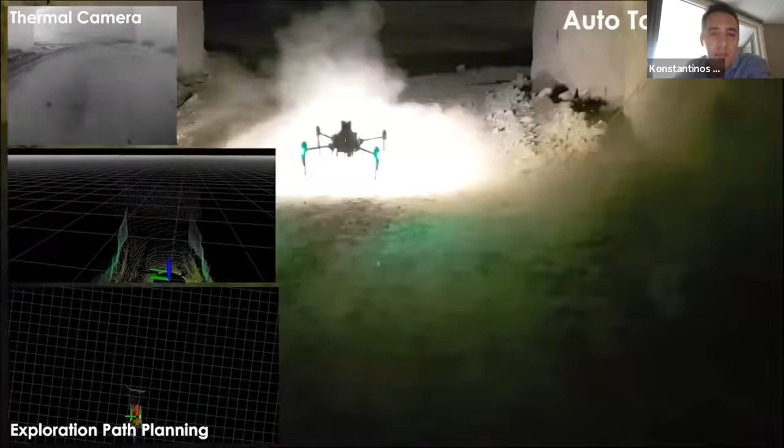But before that, let me just show a small video that is kind of a mashup of results, just to indicate that we want systems to be able to access, navigate, and conquer effectively a diverse set of very challenging environments. So here's a drone, flying in an underground tunnel.

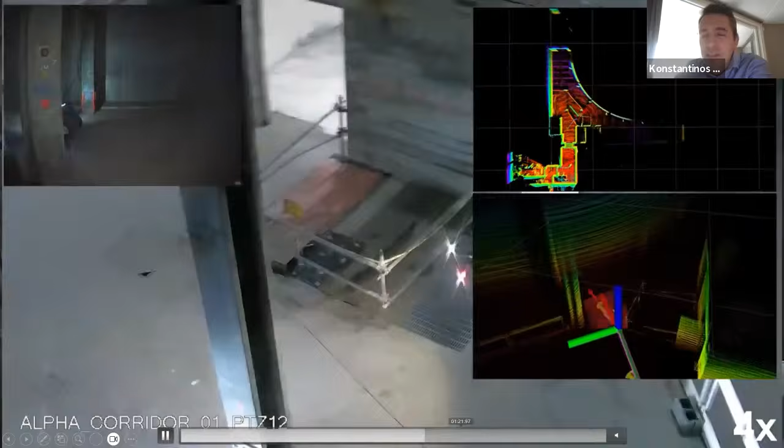Here's a legged robot performing exploration in an underground tunnel. Then we can see the process of deploying 4 of such systems in an underground network of different facilities. We can see this drone flying through smoke and dust, navigating and exploring a nuclear power plant. Most of these results come from the DARPA Subterranean Challenge in any case.

Exploring and inspecting a ballast water tank inside a ship, on the sides of a ship, so the ballast tank facilitates stability of the ship. The same drone exploring an underground abandoned mine, also somewhere in Norway, close to Trondheim, close to the university. And also a modification of the same drone navigating through a forest, eventually all of them with a goal of getting some sort of meaningful representation of the environment, understanding reason about it, and so on and so forth.

So I think the key message I want to point out is that we care for autonomy that is deployable anywhere with very little preparation, if any. So the ultimate holy grail, of course, that everybody considers is the ability of enabling robotic systems to go at any place, in any condition, subject to any possible uncertainties and risk, and execute a mission with safety and reliability.

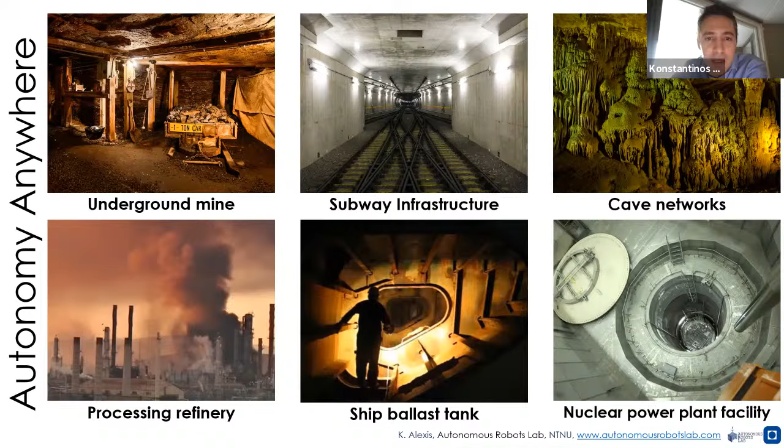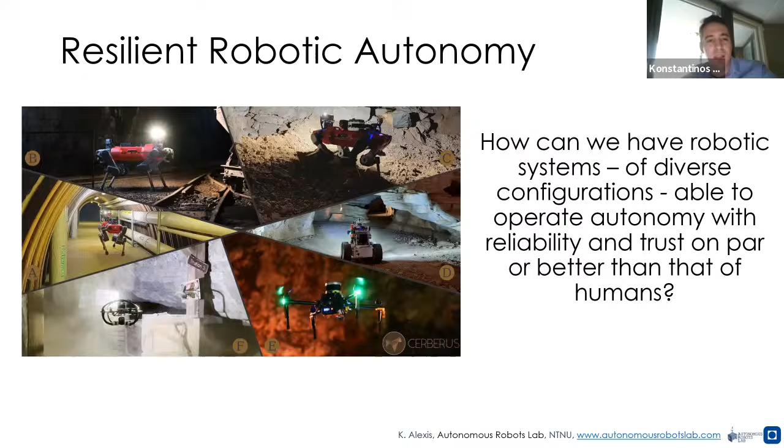Now, if we try to think about this in a general sense, then we ask the question, how can we have robotic systems of diverse robot configurations, not only flying, for example, not only ground? And what is the commonality between trying to develop autonomous solutions across diverse robotic systems in order to instill onto them reliability and resilience? And if we look at general studies about resilience, we will see that we are asked to instill into systems these 5 key properties.

This is the universal recovery, the ability to recover from an error, response to an error, response to a challenge, robustness against errors and challenges or uncertainties, and so on and so forth, redundancy in case of potential failure of any of its components, and resourcefulness, which is different than redundancy in the sense that it's not only necessarily replicating solutions, but also using your own resources in a different way in order to execute the mission to the best of your capacity, right?

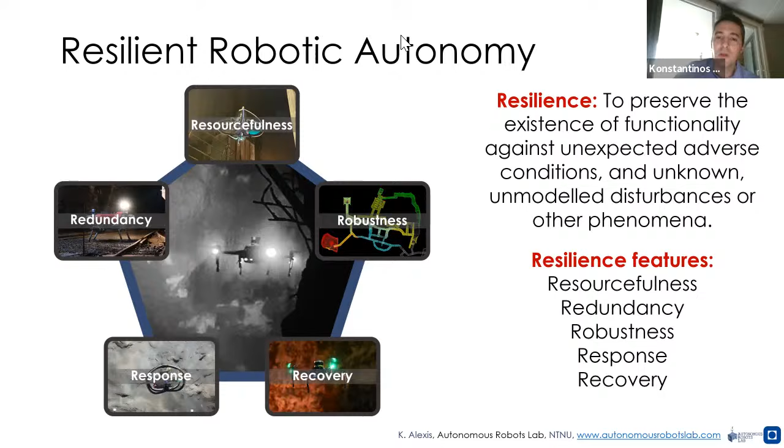And at least ensure the safety of the system and the safety of the environment, of course, and of course, the maximum potential capability of executing the mission.

Now, if we try to think how we can instill resilience, we should think of the general loops of robotic systems. And my main first view is that despite the great progress we have on data-driven methods, it is a very good idea to try to modularize the architecture of a robotic system in the sense that it is key to identify what are the specific components that have to be designed, what is the role of model-based or traditional methods, let's call them, or data-driven methods within each of them, and put them together in an architecture that makes sense in order to facilitate and prove, or at least demonstrate or verify with whatever means of verification this is most applicable, that the system will operate resiliently in any environment.

I'm going to spend 2 or 3 minutes on a very simple diagram, right? Just to consider that, typically, if you come from a controls background, your view about the robotic system is typically something like this, right? There's a system, there's a control module, there's a planner, some perception module, which in the simplest case just performs basic state estimation. And of course, in the last years, people have also coined the idea that, well, we can just learn all of it in an end-to-end fashion.

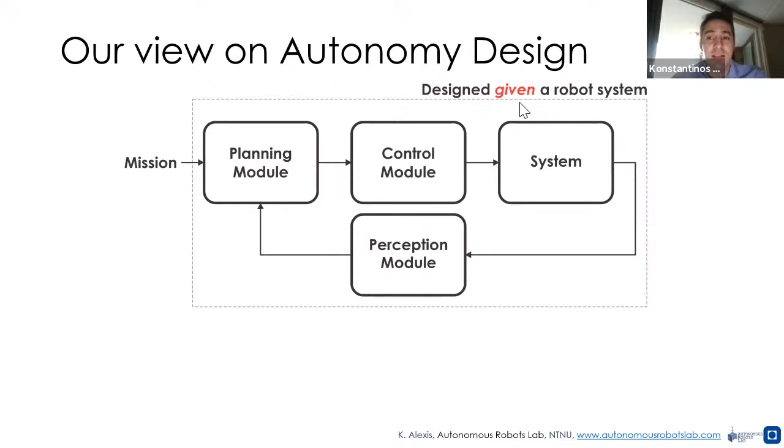In both cases, people are designing this given a robot from some designer, some company, and so forth. So there are two limitations in the core pipelines: one limitation that breaks everything into subcomponents perfectly and designs it given a certain robot, and another limitation that still uses a certain robot design but tries to learn an end-to-end module.

Of course, in reality, people are doing more like this at the moment. They have several modules with models and learning into each of those, and there is more interconnection between the modules and more back and forth communication between them.

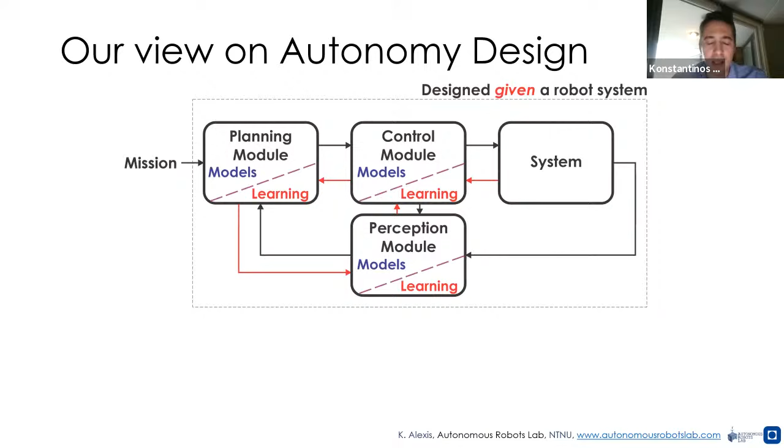But I think the most important thing we should be going toward in the future is the potential of co-designing autonomy and embodiment, connecting our research with the broader discussion about AI. The first core message I want to make today is that robots are embodied agents, and this is a distinct feature compared to general AI agents. So we should consider not only, given a robotic system, what can we do for its autonomy, but could we explore the co-design of robot embodiment and autonomy synthesis.

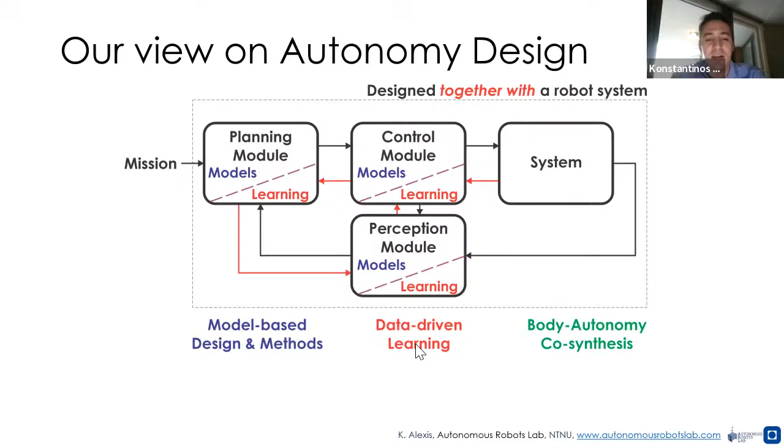If we focus still on the lower part of that, I'll comment about this co-design at the end of this talk. We should be thinking about the synergy of model-based design methods and data-driven learning, and of course the best synergy is guided by the notion of performance and safety.

Back to my comment on embodied agents, I highlight that we should not just treat robotics as an application for other domains and perform the best possible SLAM or best possible control and so on, but we should reflect on the specific needs of robotic autonomy, and possibly what a robot design in terms of an airframe, a legged robot, or an underwater system can assist in making autonomy more resilient.

In other words, it's a good reflection to think that, for example, our body is very forgiving of potential errors of our autonomy, our ability to navigate. What I'm going to try to talk about today is this direction: how can we instill resilience into system control, planning, and perception?

So let me now jump directly back into the modularized resilient autonomy architecture and try to go topic by topic, from multi-modal perception to path planning, and then to policy learning, and eventually demonstrations from robotic systems.

When we say resilient perception in the view of our lab at the moment, the core things we care about are: first, we need to be able to operate without infrastructure support or other means of external estimation of the robot pose or any other part of the state. We typically just say GPS denied, but this broadly means no infrastructure support. Sensor degraded conditions in terms of self-similarity, darkness, obscurance, and so forth degrade the quality of the sensor data. We need to be able both to perform SLAM in these conditions, but also reason to the extent possible about the environment.

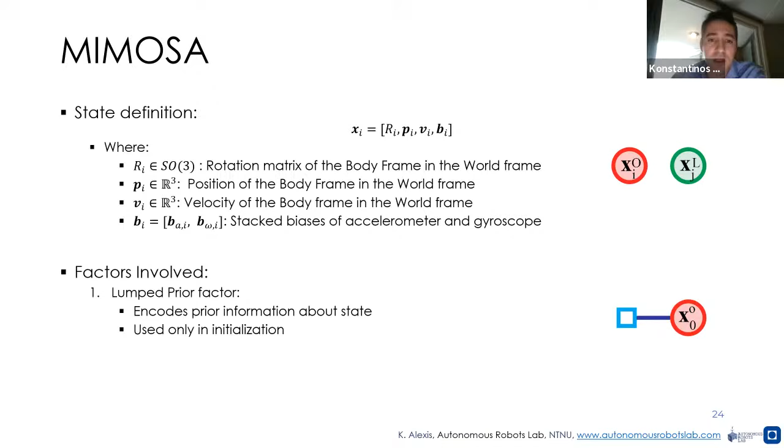We believe factor graphs are a more applicable tool to incorporate the relevant formulation in a flexible fashion. It allows calculations dealing with short-term associations, but also mid-term and long-term associations, estimating the robot pose and including constraints from different modalities—vision, IMU, LiDAR, and so on—in distinct ways, while still incorporating constraints from any such modality.

Importantly, it allows us to deal with modalities arriving at very diverse and possibly not perfectly synchronized timestamps, which is suboptimal but can happen on a robotic system. It allows us to operate on different spatiotemporal scales through a fixed lag estimator combined with a full pose graph, and this can run on multiple architectures, possibly on two different levels.

It allows us to deal with a constraint that later is found to be ill-conditioned, due to, for example, geometric self-similarity, and to connect and disconnect constraints from the optimization. It also allows us to detect short-term degeneracies, for example by tracking the eigenvalues of the underlying optimization on LiDAR registration, or long-term degeneracies, which means we can reformulate the graph back in time and use it for estimating the robot pose going forward.

This means we are effectively changing how the Markov process evolved over time, because we identified later that some earlier estimation was wrong. We need this ability to dynamically reformulate the graph in order to correct future errors for ill-conditions detected later in time.

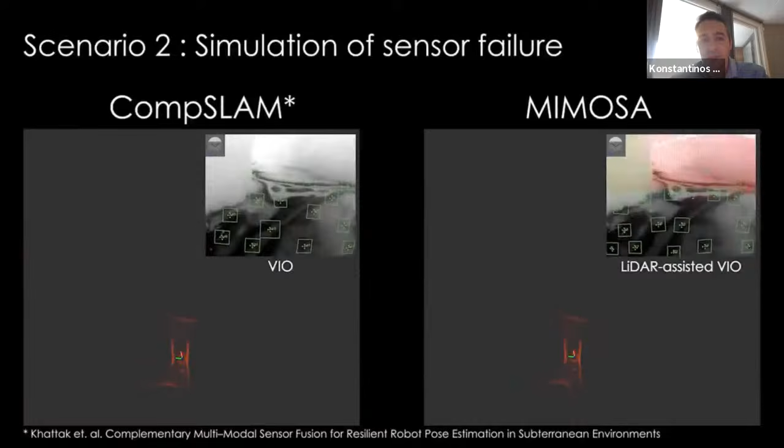Here we're fusing thermal data and LiDAR data, and we've simulated artificial loss of LiDAR data. We can maintain reliable localization and mapping even under such conditions.

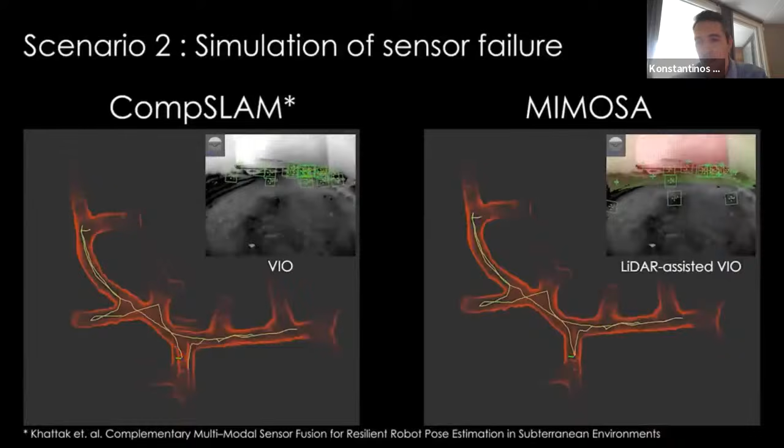I think this is currently well established in the state of the art—nearly all teams in the DARPA Subterranean Challenge provided some solution of this nature. So I think this is something we want to keep building further, to make it effectively a tool that can incorporate any such modality.

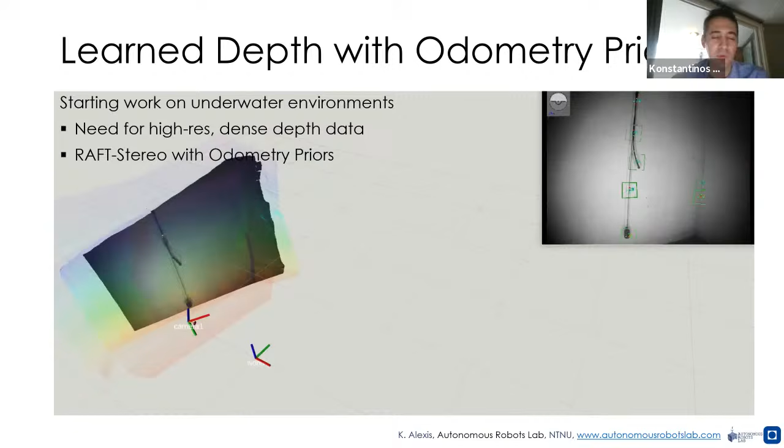Any such modality, either directly with traditional methods for incorporating and assimilating relevant sensor data using traditional registration techniques, or by improving how sensor data can be incorporated through possibly learned methods. Here's an underwater test for learned stereo depth that incorporates odometry priors—again, the idea of combining learned methods with traditional techniques.

The odometry priors are incorporated in order to use the previous point cloud and the odometry update to predict how the future point cloud would look, and then to initialize and optimize the problem to converge faster and more accurately to the solution of what the current depth is.

I go through many topics in this talk because I'd like to present our overall architecture for resilient autonomy. But the key takeaway from the previous slides is that we want a solution able to deliver at least the ability to know where you are in the map of the environment, subject to any condition—and the solution to that is primarily multimodality.

I haven't yet commented on understanding the environment, semantics, and so on—I'd like to do this as part of the section on resilient planning. In path planning, it's very common to solve single objectives such as exploration, coverage, or path planning. At the same time, it's obvious that a robotic system deployed in a very complex, industrial environment is unlikely to be expected to execute only a single task, unless it's a highly tailored, human-driven, highly supervised process. If we care for really autonomous systems, we first care for multi-objective, multi-hypothesis optimization.

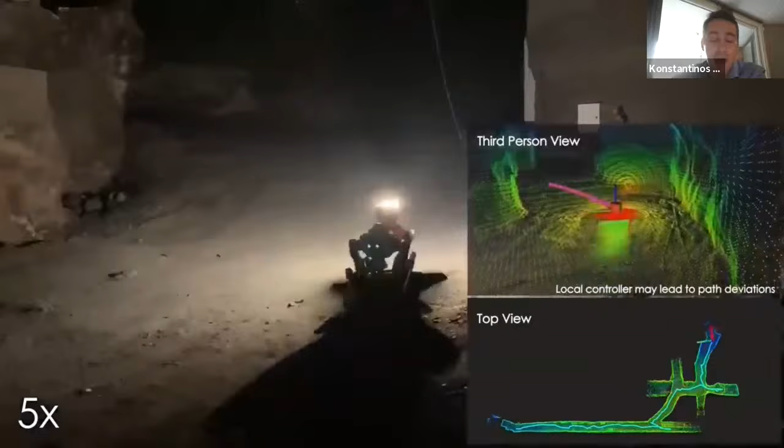This was actually a few months before our team went to Kentucky for the SubT Challenge finals. At this point, what's key to understand for the mission, otherwise it just looks boring, is that the robot performs this relocation process multiple times in order to reposition itself to interesting areas of the environment that are pathways for gathering more information before returning home.

At return home, there will be a flying robot that will actually execute the remaining exploration of the same area of interest. I'm not going to play the full video—it's relatively long—but at this point, for example, the flying robot is exploring its own path in the environment.

I mentioned that it's important to reason, not only to explore or inspect. Reasoning about certain objects of interest in the environment is also a means of compression. If I go into a very large scale setting but only care about particular structures, for example for some industrial inspection application, I not only have means to focus my attention more, but also means to compress the information I really need to store.

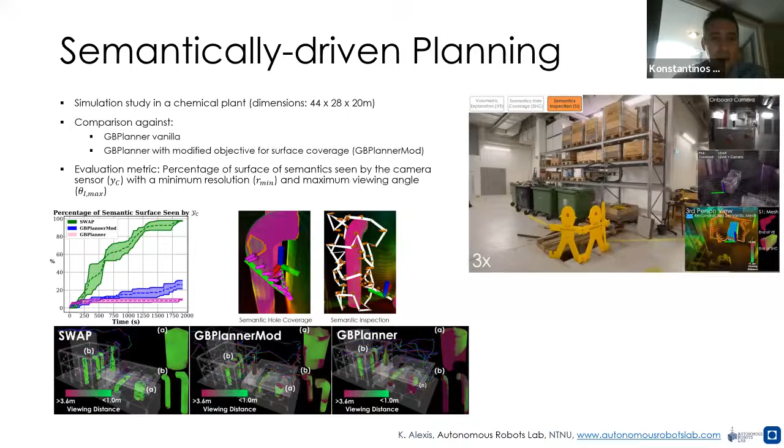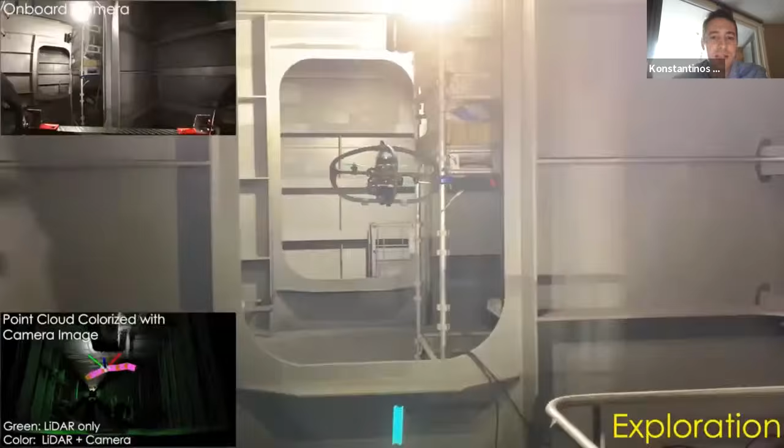We can take this now and go to very different environments compared to, for example, the Tartan Challenge, enter the ballast tanks of a ship, and here we deploy the robot. It's actually exactly fitting the access hatch of ballast tanks, and we get it to explore these environments and provide maps for us.

Here you see, for example, the results where the system conducts a process that bifurcates between two behaviors: an exploration behavior, which ensures volumetric coverage so the LiDAR has seen everything in the scene, and at the same time visual inspection, where the system switches - this is what's executing now - makes paths that look all around with certain resolution and incidence angle guarantees in the environment. It's going to execute this over several sections of this ballast tank compartment.

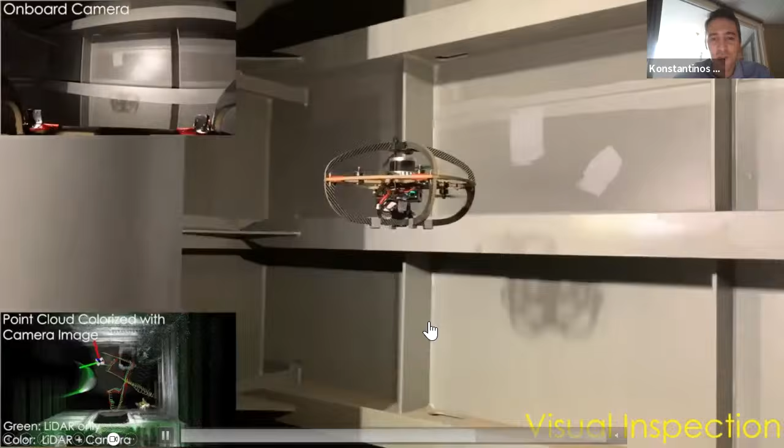Now, ballast tanks are rarely as large as you see in this particular setting, which is kind of spacious, where we just have to go through very large doors. Most likely, ballast tanks look also something like this, and the pear-shaped manhole that you see there is 0.7 by 0.5 meters in size, and the robot is roughly 0.4 meters in width.

So it is key to have a system that makes actually a small bump due to some small error in Z, but without any particular problematic effect on the system.

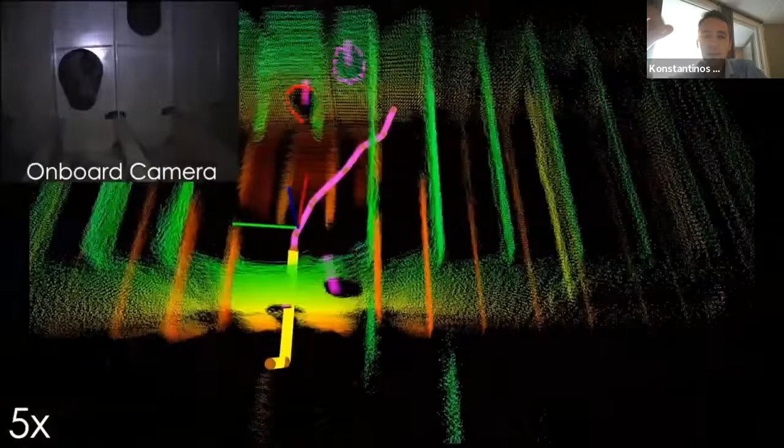It is key to have a methodology that's able to scale across environments that can be, in principle, very large in overall scale. An actual FPSO vessel, for example, has multiple hundreds of meters of such ballast tanks inside, but at the same time has to be able to negotiate particularly narrow cross-section access pathways and so on.

So we need the semantics not only to know what to expect, but also as a way to identify how we navigate better such types of environments. This is also why we have this terminology: inspection semantics and navigation semantics. And we're using the manhole detection here as a navigation semantic to drive the exploration process of this zone.

Now, resilience and reliability also means you can take the same method and apply very little to no change and deploy it in a vastly different environment. So we were here actually last week in some field tests in Helsinki, or outside of Helsinki in Finland. We're deploying this exploration method in order to negotiate, navigate, explore and map a forest there.

It's quite notable that it's a forest that's highly dense with many sticky branches, which represent very difficult obstacles to detect and therefore avoid in the volumetric map. Nonetheless, the method worked, to our surprise - or not necessarily, but in a good sense, surprise - it worked reasonably well in this environment. The thing we couldn't do much about was going faster, since it was never really designed, tested, or tuned for any such environment. But even without any tuning, it was able to provide reasonable results.

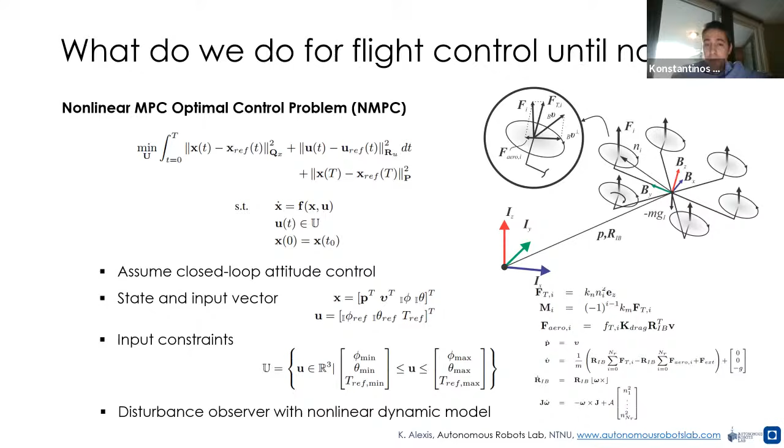And the formulation that you see here is very old, comes from the times when I was doing my PhD and later my postdoc at ETH, but it's something that's quite standard currently in the community, to implement some sort of MPC for a flying robot. You can also use any other type of control, if this is your preference. There are some good benefits.

For example, here the robot has lost a propeller. It keeps overall XY authority, but otherwise it loses yaw.

I would like to depart from this classical approach of splitting everything into modules perfectly, and instead think of control as three things. First, a way to fly or go to a particular destination—that's the classical approach. Second, a way to avoid obstacles and ensure constraints—not only the classical sense of well-defined state and input constraints, but constraints generally in the environment, such as avoiding obstacles or traversability for a ground robot.

The third thing would be a methodology to gather, at very local, short spatio-temporal levels, the information necessary to plan all your other actions—to get better data for your SLAM system, better information for semantic reasoning, and to eventually plan better paths for inspection, exploration, navigation, traversal, or possibly different robot manipulation tasks.

So we try to create a kind of super module—a control policy that will not rely on the necessity to have maps. We don't want to replace the need to have maps; we want to have maps, and we want to exploit onboard SLAM and so on. But we also need a system that is ready to work even when traditional SLAM might fail.

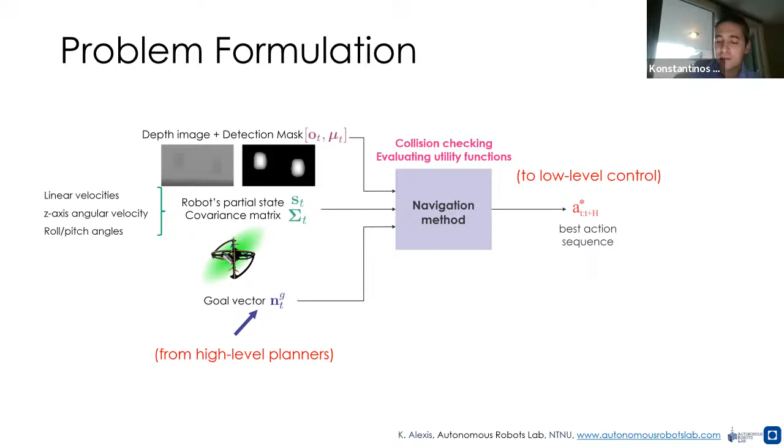Then we want this navigation policy to be able to spit out control actions to follow, commanding a low-level controller that executes, for example, roll and pitch commands and thrust commands for a multi-rotor—essentially replacing traditional position control, while simultaneously offering resilience against significant, long-term failures in SLAM, and also the possibility to attend to particular viewpoints and areas of interest.

Now that's the architecture of this particular method. We call it Oracle, and it assimilates a depth image, or a sequence of depth images eventually, and the robot's partial state. It has a motion primitives library and a collision prediction network that identifies which of these possible actions are collision-free. I'll also show an extension of this to account for information gain.

Eventually, this involves a layer that compresses the depth image, going to increasingly lower dimensions of the original depth image. Then this is combined with the robot's partial state.

Instead of taking only the mean of the robot's partial state, we're also going to get the uncertainty into account. For that, we're going to use the unscented transform, getting sigma points for the uncertainty over the partial state.

We're going to use an LSTM, a recurrent network, in order to better predict the effect of a certain action and train this methodology. But instead of training a single network, we're going to train an ensemble of collision prediction networks in order to better deal with the epistemic uncertainty of the process, while the aleatoric uncertainty is mostly related to the uncertainty over the robot's partial state.

So we take the covariance into account and use the sigma points over the covariance to account for it. We're going to get motion primitives represented in 3D velocity space, so we'll be commanding velocities for the robot.

As mentioned, there's a component that deals with the aleatoric uncertainty over the robot's uncertain partial state, and a component that deals with the epistemic uncertainty through a deep ensemble of collision prediction networks. This especially relates to how we best handle cases of weak input data.

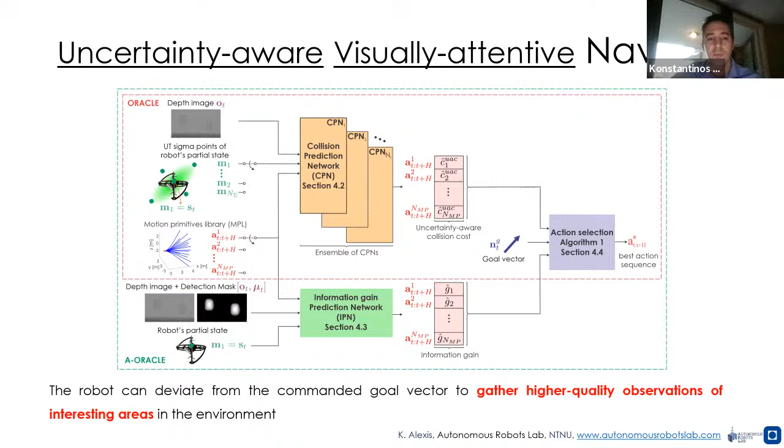We can take this general principle and feed it back to the previous method, forgetting the need for a map, and use this mask associated with a depth image to train an information gain network that uses an expert which truly knows how a certain viewpoint gathers future information about the area of interest. We do this in simulation, of course.

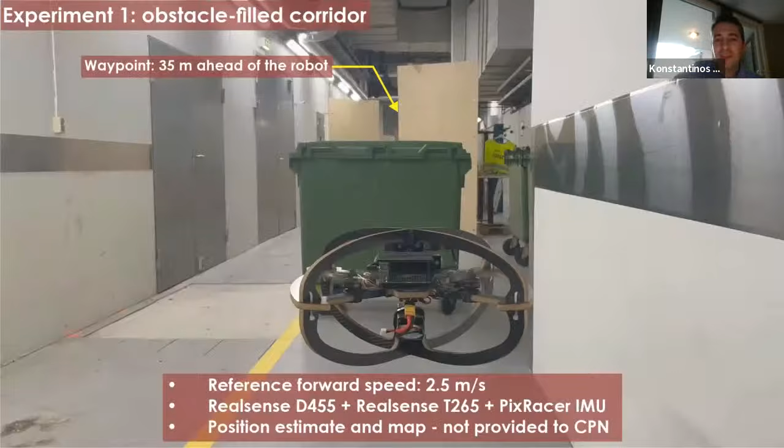This information prediction network can then output a prediction of the information value of any of the motion primitives mentioned before. Within these motion primitives, we can take the one that is safe while simultaneously offering as much information gain as possible.

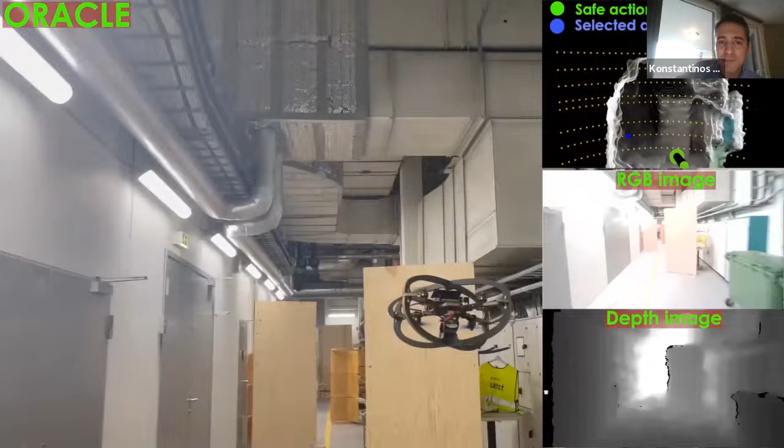Let's see some experimental results. Here the robot will take off, flying at 2.5 meters per second. Remember, there's no position feedback in what you see, and no map of the environment at any point in time. The robot will navigate the setting and avoid obstacles in its environment with good success.

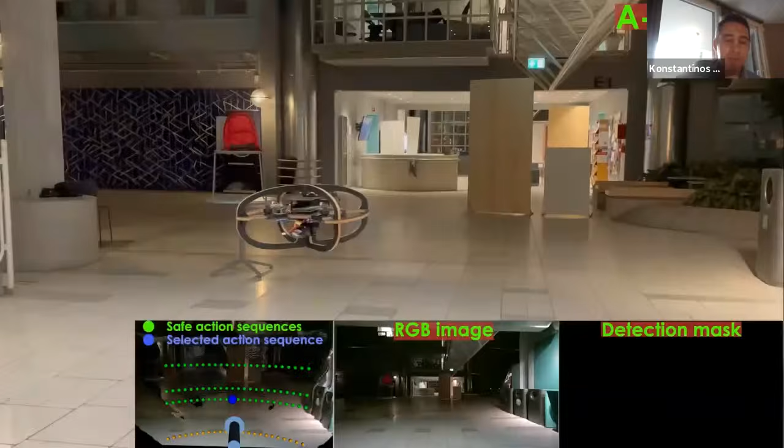Now if we take the same setup and deploy the robot not only for collision avoidance but also to attend to objects of interest, which we give a mask by running an object detector, we can fly and the robot will look towards the area of interest.

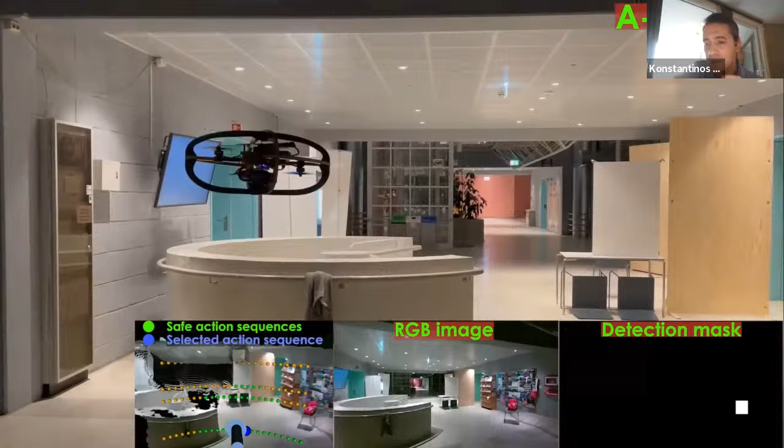After it comes within its view, it makes a small adjustment of its viewpoint while it keeps going towards the desired destination. It's key to mention that in this particular result, the velocity estimation actually failed miserably, but the method does not necessitate that the velocity estimation is reliable.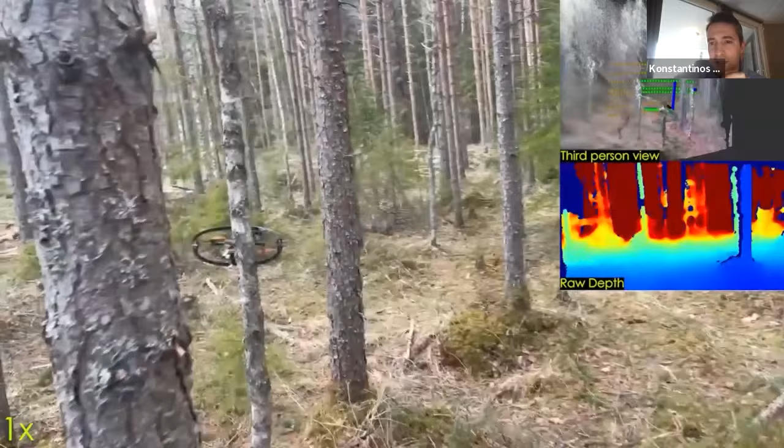It only necessitates that you have a good model of your uncertainty. Just keep using the forest as an example of transferability and resilience in very diverse and different conditions. This is from the same results last week, where the same method, never deployed before on forest data other than one week prior when we went to Finland to perform this test as part of the project, is able to negotiate reasonably well this dense forest, with multiple trees per square meter.

Now, however, you could criticize that there's nothing modular in that—here we trained an end-to-end policy. So we reflected upon this, and we thought that the greatest limitation of training this policy end-to-end is that although we can get relatively easily data that presents the problems of real sensors, we have no way to model them in very high fidelity simulation, or it would be excessively difficult to model all the problems of real sensors in simulation. So although we can easily get data of real environments, we have no way to assimilate them in this training process. Therefore, we remodularized and redesigned this pipeline.

This modularization allows us to train a semantically enhanced variational autoencoder that compresses the latent space, and this latent space will be used alongside the robust partial state to perform the process I described for collision-aware navigation, as a control policy that runs at a very high update rate. These methods run at 20 Hertz, for example, on the onboard computer of the small drones you see on our side.

These drones are all between 1.2 to 1.5 kilos in total weight, including all sensors, batteries, and so on and so forth.

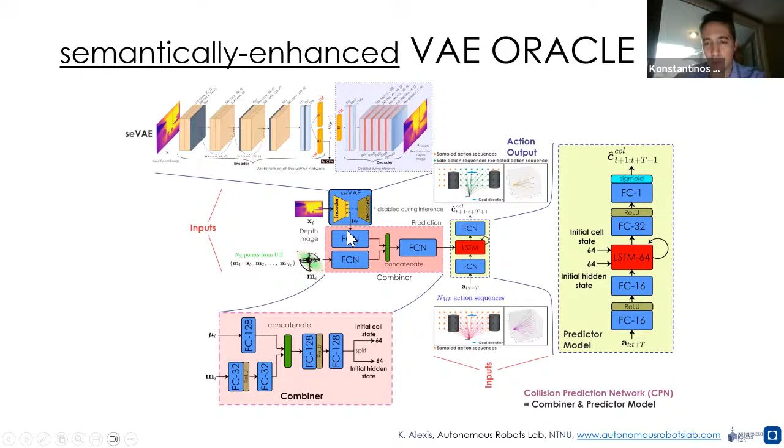So we go, for example, in this architecture from the depth resolution of a classical depth camera—let's say 128 variables—which are then fed into the collision prediction network, a great reduction in input dimensionality.

Here are some results, and we demonstrate that if you were to use traditional methods, you wouldn't be able to reconstruct this properly at the reduced dimensionality, for example with FFT, as reduced as the semantically enhanced VAE. Just a traditional VAE will also fail because it doesn't pay particular attention to the difficult-to-reconstruct objects of interest, and the semantically enhanced VAE actually manages to do exactly that.

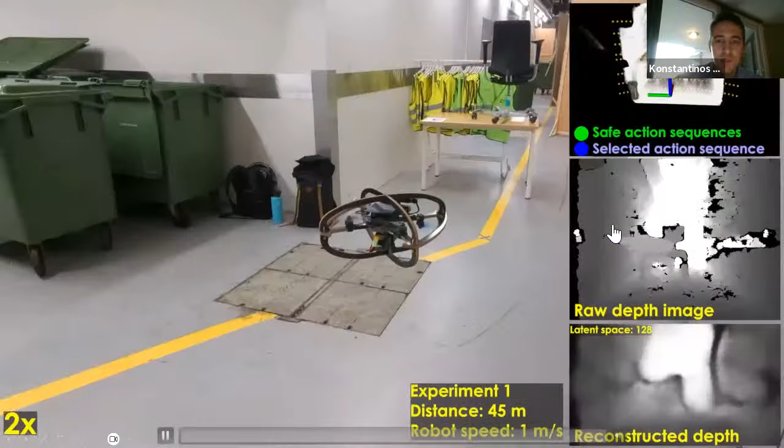So if we deploy this now on the robot, the result you see here shows the system does not perform SLAM, does not have the position estimate of itself, and so on, but has the attitude estimation, because attitude estimation for flying robots is relatively easy to achieve, and it's able to negotiate navigation within this packed environment that also involves some what we call thin obstacles.

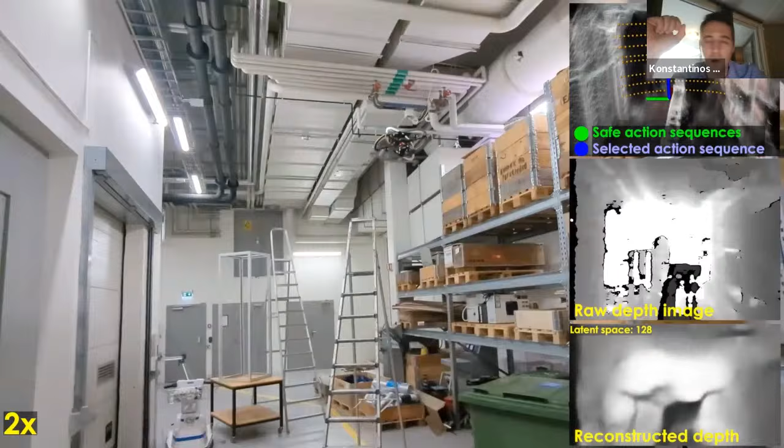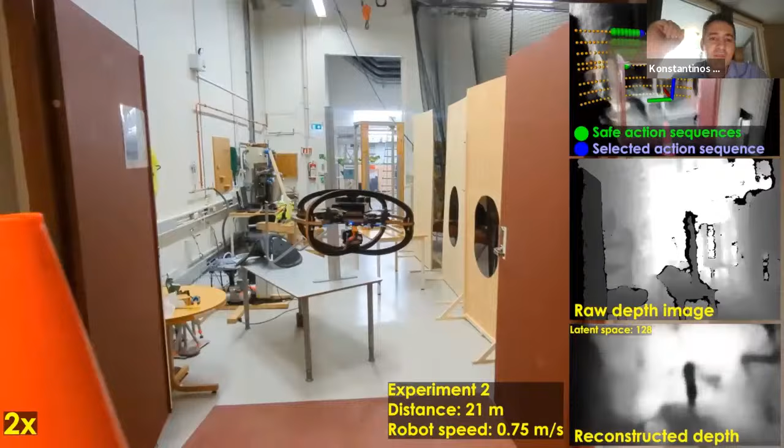Now, this one, really thin, was 4.8 centimeters. In the next part of the video, this is going to be up to 2.5 centimeters in width. And another key factor is that we are able to run this increasingly faster as GPU availability onboard increases.

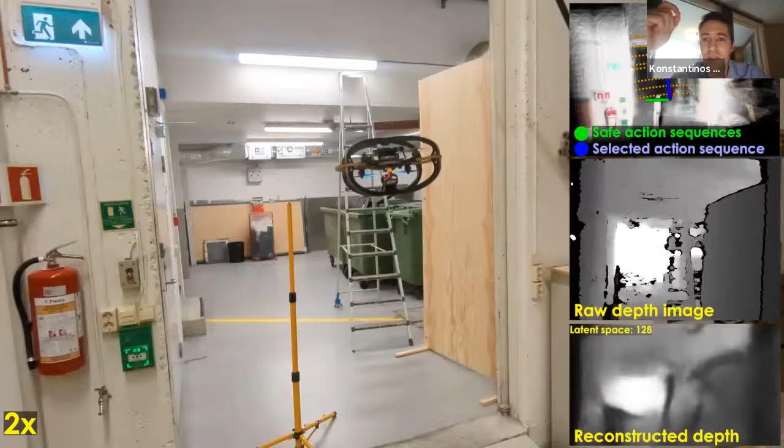I believe it's not far away to run this up to 50 or even more hertz, which means we can run these prediction and inference loops very fast, and eventually achieve faster and better control, including collision avoidance, which allows us to mitigate some risk on the path level.

Again, just as a test, we took this modified method back to the forest, and it was able to negotiate this particular dense forest reasonably well. Those of you who do field robotics might notice some duct tape on the system. The only problem was that our main visual estimation for getting the velocity of the robot was pointing somehow upward, because this robot was originally made for underground environments, and pointing up towards the sun is not the best thing. That took quite some time to fix in the field test.

Since I mentioned field tests, I want to highlight, coming into conclusions, the great importance of field results. As a personal statement, it's not only because we can see and evaluate the results. For me, the most fruitful process of field testing is that we see things we didn't necessarily expect in lab evaluations, and this often enhances our research agenda for a good amount of time into the future.

What you see here is the Cerberus field testing regime from 2018 to 2021. This was a highly international team with colleagues from the US and Europe, including Switzerland and the UK, and several entities in the US. I myself also moved from the US to Norway during the execution of the project, and therefore you see many tests in many places.

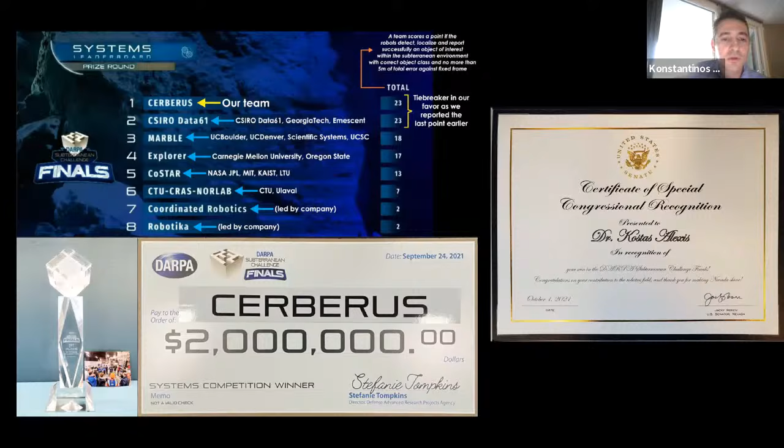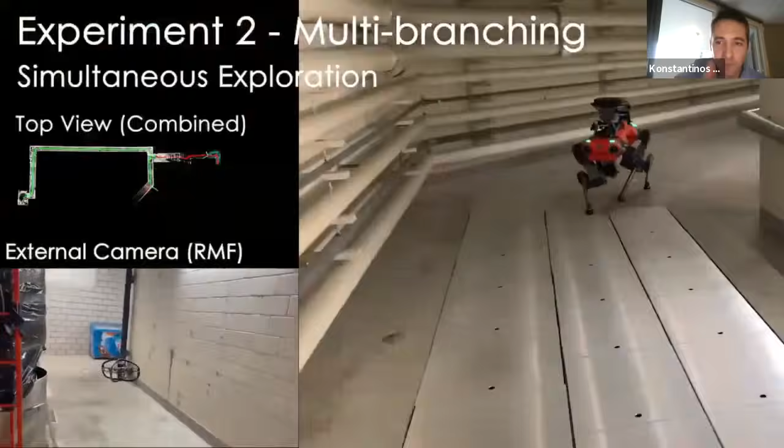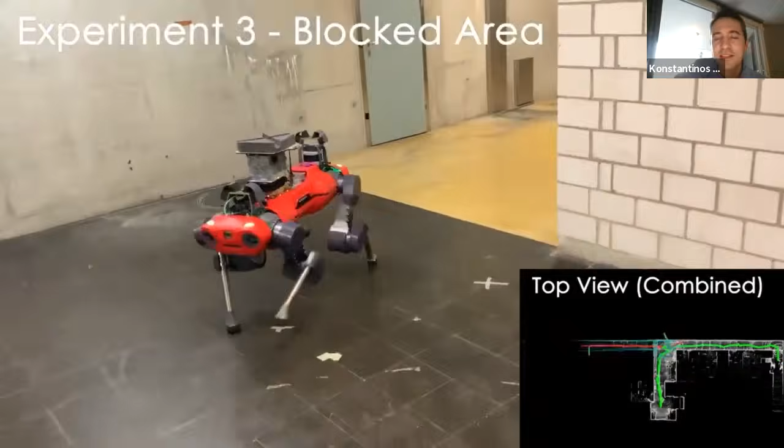Before I close, I want to highlight a couple of things in terms of what we consider a good lab, and also some ideas for the future. Here's an idea of what we consider a good lab: this is an integratory process. I think these are things we do because they're cool and because robotics are cool, so nobody necessarily required a legged robot that deploys a flying robot, but some things of that nature are cool. Some things in robotics can be very useful, and we haven't achieved their deployability so far to the extent necessary.

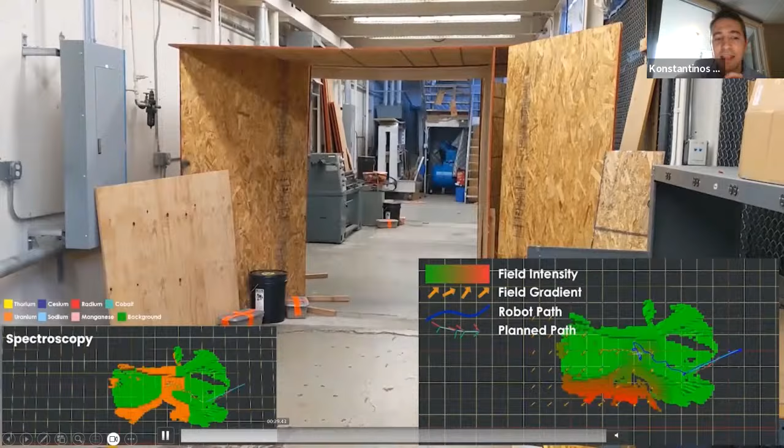This is a robot that demonstrates the ability to do nuclearized mapping, characterize radiation, and identify isotopes of interest. This is happening to a certain extent - recently, for example, a deployment in a DOE facility in the US - but this should happen much more, because robots are ideal to take on a host of relevant applications we don't want to send humans to, and also to work alongside humans, for example in industry.

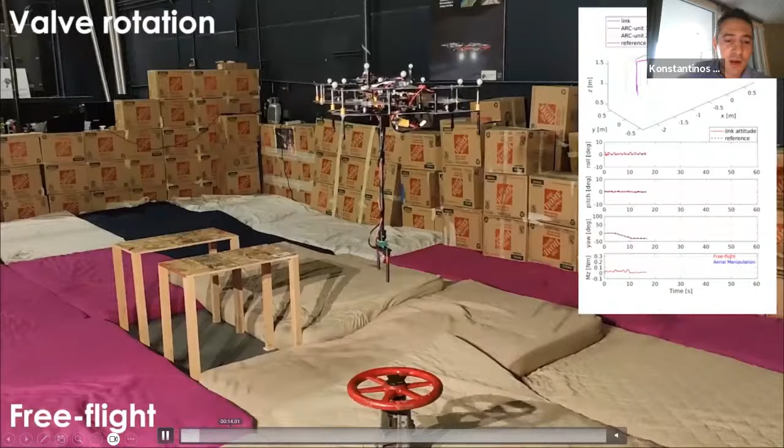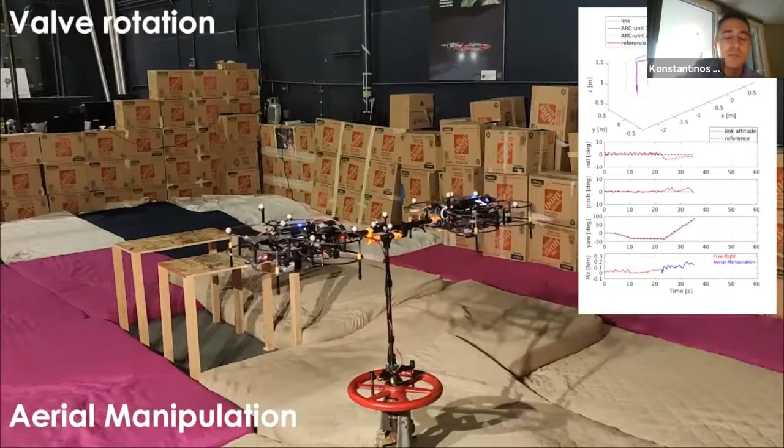We can also do things that are interesting just because nobody asked. Here it's a connected multi-robot system: two quadrotors connected with each other performing a manipulation task. The underlying math of control is very beautiful, and the stability proofs are very valuable to develop during a PhD, with lessons learned that are transferable, even if this particular system isn't the one industry will use in the future.

Before I close, I'd like to explain one picture summarizing where things will be going for us in the upcoming future. We're going to investigate the possibility of co-design between embodiment and autonomy.

I think this idea is quite old actually - people have explored it through evolutionary design and so on. But the key observation for today is that we can remove the rate limiter of designing a controller for automatically generated embodiments. The rate limiter was that we didn't have success in auto-training, RL, or otherwise learned controllers. But now we have great success learning control policies, including collision avoidance tasks, at very high rates - potentially on par with generating new variations of a robot class.

So should we be using quadrotors for any type of environment, as we tend to do nowadays? Should we use quadrotors plus rotorcraft designs and so on? Up to 2023, if we look at the drone domain alone, we are mostly using miniaturizations of traditional aerospace designs. There is work on biomimetic approaches, but that follows another paradigm - copying what we see in nature. We could instead design optimized machines in terms of their autonomy functionality and capabilities for a certain class of environments.

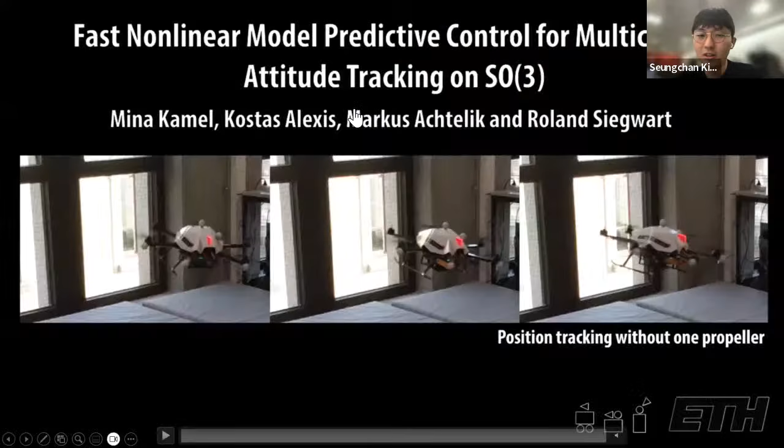For example, you can use a voxel map and say I perceived this area or I didn't perceive this area, colorizing every voxel accordingly. Nonetheless, this doesn't mean your mesh reconstruction—depending also on the meshing algorithm you're using—will be finely detailed in any particular section. You can have problems with detail, and you can have complete holes in the mesh simply from the meshing process.

So the first thing we want to ensure is that if we want to reconstruct the digital twin of the environment, we don't want the robot to come back with data that has problems, then have to deploy a second mission. We've discussed with industry and people who use drones to manually collect digital twins, and they've reported this problem multiple times. So first, we wanted to make sure that when the robot comes back, even though the overall environment hasn't been captured perfectly, in the areas of the semantics everything has been captured to the level that there's no hole in the mesh.